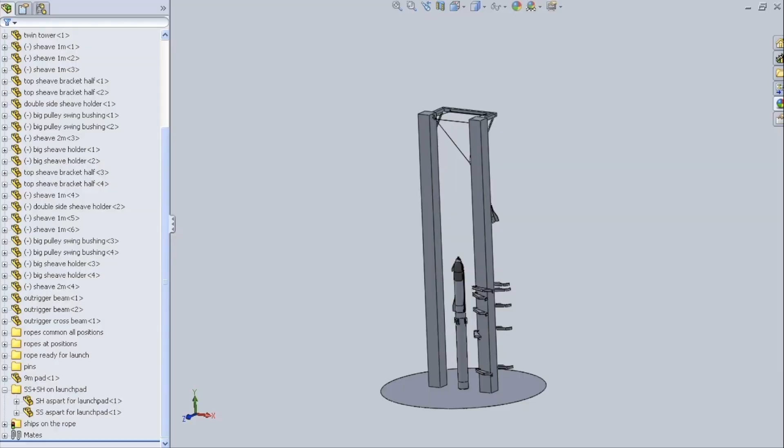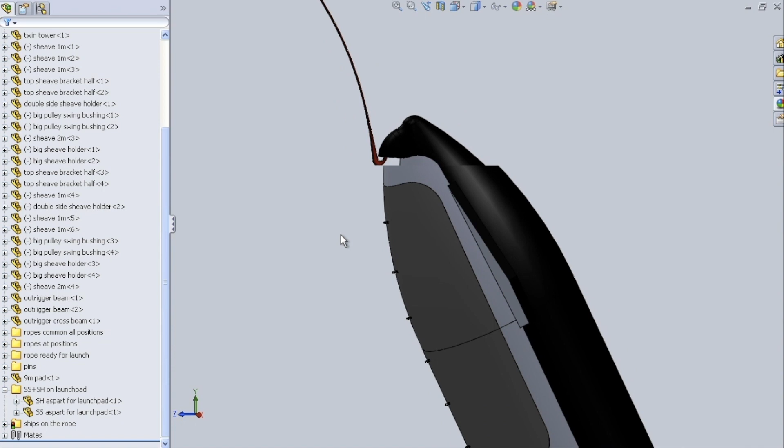You know, for the longest, this was the best idea I had for how to catch Starships and Super Heavies with a wire, like a vertical aircraft carrier. The idea was that Mr. Starship here would have this flip-out long hooky hook thing. I'll show you that. Yeah, let's zoom in on that, Craig.

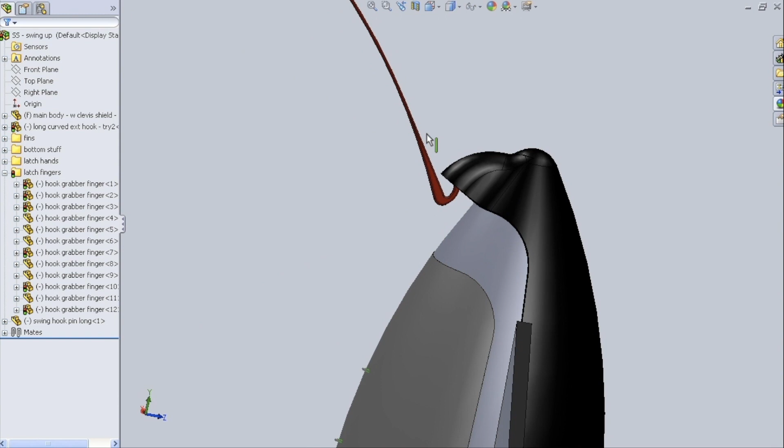Where is that? It's this one here. Yeah, so the idea was that it would have this special heat shield beak, to make room for a pivot point and an actuator and stuff, so that this long thing could swing up like that, and there would be Mr. Hook, and it would never be shaped like that. It would have a much more complex shape.

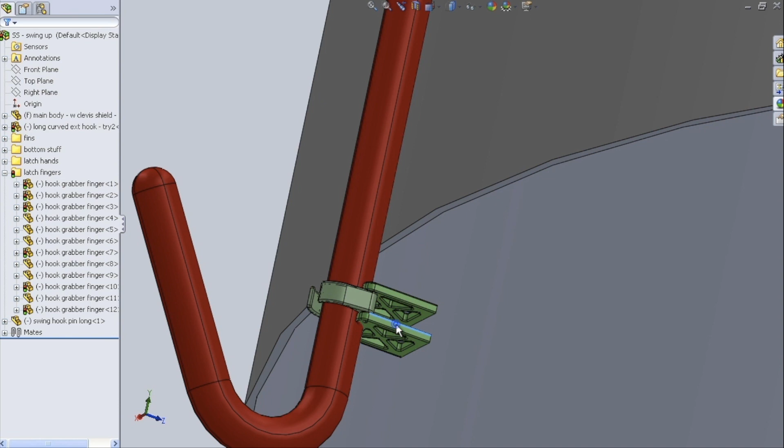But the idea is that this thing would blast up into space, held down not against the cargo door, but against the main body with one of these gripper things. But it would also need a bunch more of these gripper things in order to not shake itself off there and vibrate and all kinds of terrible things on its way into space. So you can already see why I'm having trouble taking it seriously.

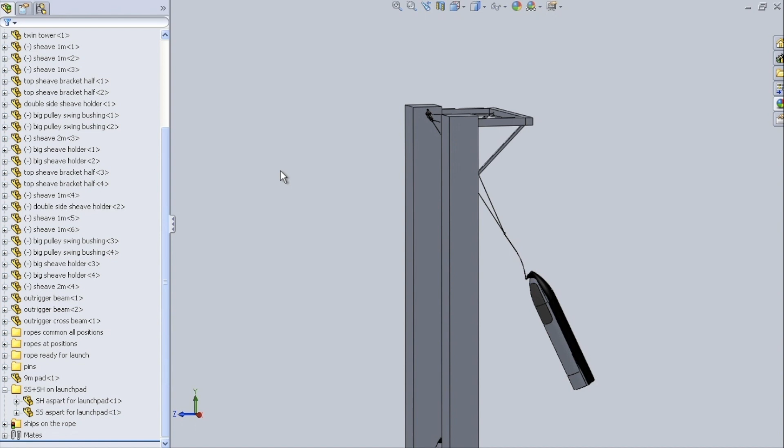Yep, and at the last minute it would swing up like that. And the idea here is that it would be coming in kind of horizontally, snag this wire from this straight-across position. You got these sheaves and pulleys and all this stuff. And it would hook on the wire and it would drop a bit to absorb that energy. And it could swing like a clock like this a few times. And then they could lower it down onto Mr. Super Heavy, which had landed in a similar fashion.

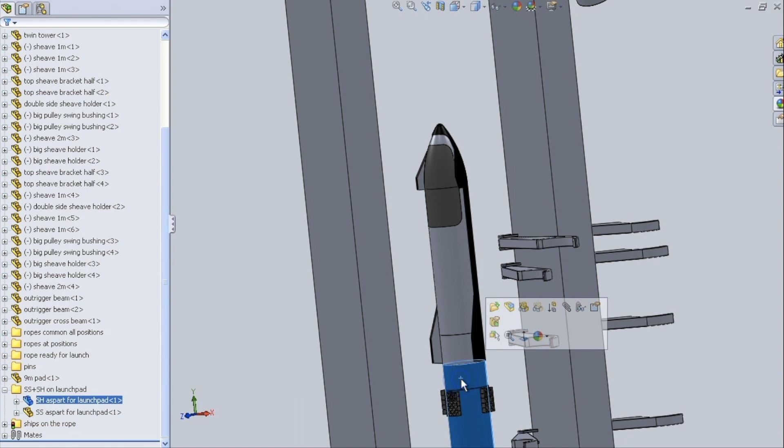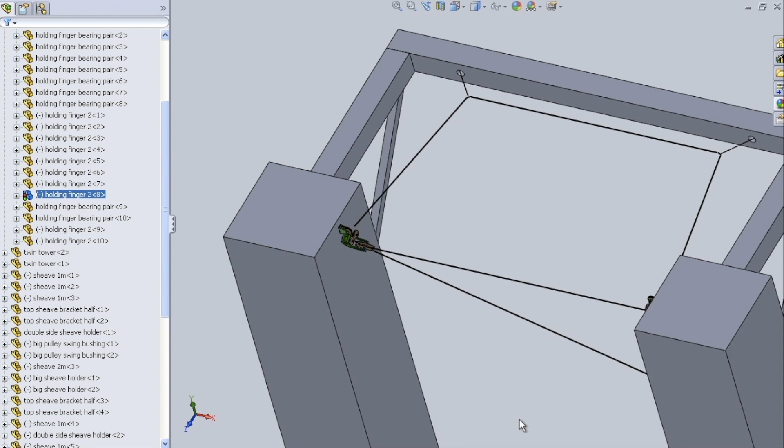I won't bore you with the details. I had a few ideas on how to do it. And then these things would come in and hold on to stuff and then launch again. And then my little innovation here was with just a little bit of trickery, one could actually pull the wire out of the way of the then upward-traveling rocket system.

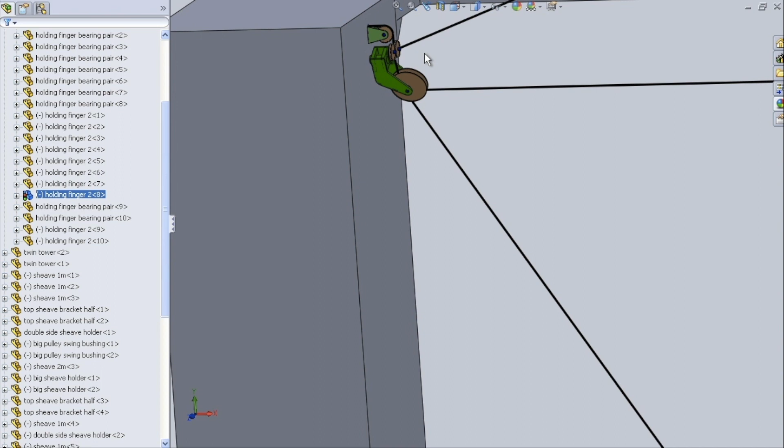But you got these two towers and they're very tall, and the spindly, flippity-floppity nature of this long hook thing, I just couldn't get into it. And then all of these sheaves and pulleys and pivots, this stuff is not easy. It's not. I just couldn't quite take it seriously, honestly.

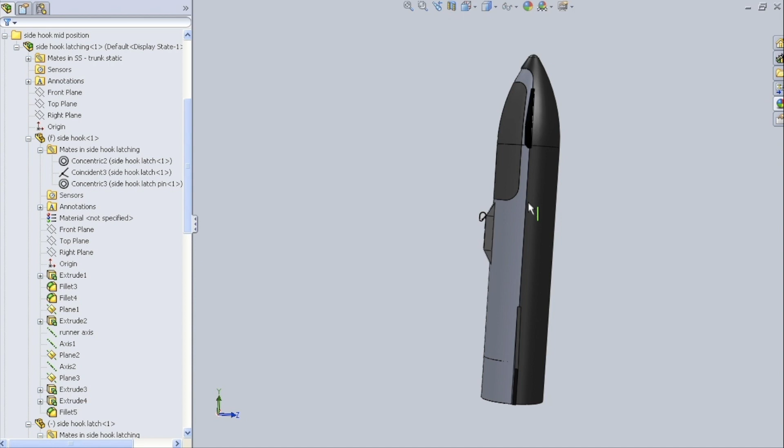I also had this one. The idea was that there'd be a hook just on the side here, static. Here I have it held out and away from that main cylinder. Maybe that's a big deal, I don't know. And that this thing would just back up into that same wire. And maybe it would help if it also had a carabiner-like snap hook on it. Maybe that would be a good thing.

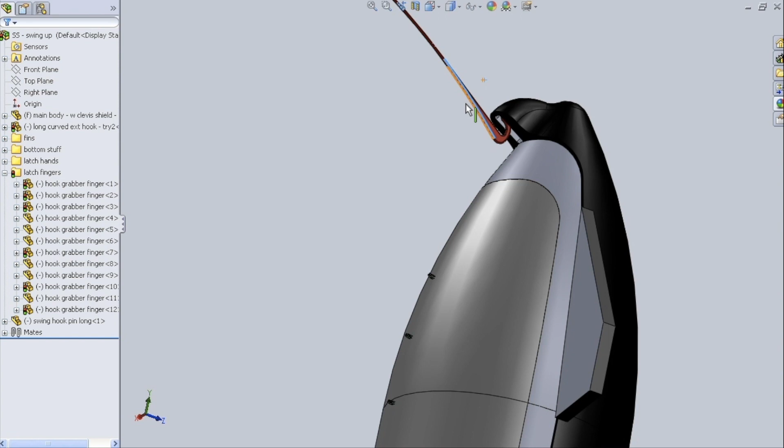But, man, these different things, well, for one thing, the long funny hook thing broke my animation engine on SolidWorks here, and that was a real bummer, so I couldn't even make a video if I wanted to. And also, I just couldn't believe in it. I just didn't buy it, even though it was my own model and I spent weeks on it. I just couldn't get into it.

And there I wallowed in my frustrated woe, a whole month, until Small Stars Mike and the Small Stars Posse, neat bunch of guys, by the way, came out with the guide hooks concept. There you go. Yeah, guide hooks, right. And check this out. So they had this idea, here it comes. Okay, you see them folding out there?

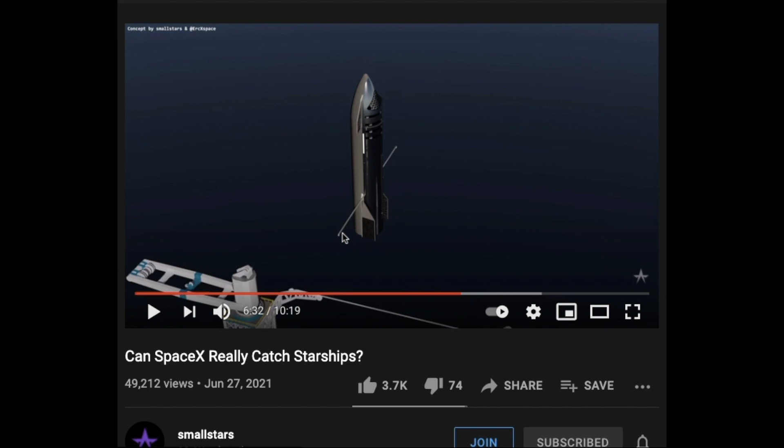There'd be these guide hook things, and their idea is that these things don't actually support the Starship's weight. The whole job of these hook arms is to allow Mr. Starship here to fall somewhere in the rectangle, and these things will be guaranteed to snag on the wires, and then they would have to be actuated, so they would take a little bit of torque, which isn't possible, Mike, if they're so long and skinny.

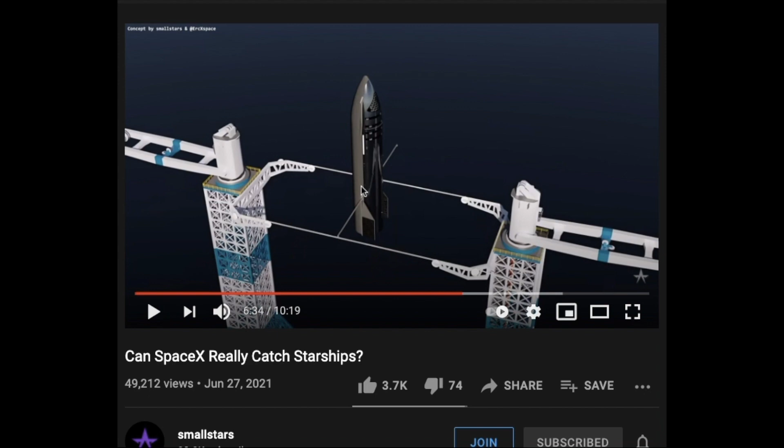But anyway, the idea was that they would fall in there, and then they would have to be actuated to pull them inwards, and then somehow hand off to some much stronger hook mechanism things that were welded directly onto the Starship's body.

Yeah, so a handoff kind of thing. And I got problems with it. It's not a perfect idea. And so what? No one cares. I was still impressed, and it was better than I had figured out for a while myself.

At least that's how it felt after I had been wandering in circles for a month with the stuff I just showed you. And it got me off my butt to think, okay, Craig, finally, here's something that you can try to derive from. I'm not the greatest inventor. I'm a deriver. I'm an improver. I'm a nerdy perfecter. And so this is exactly what I needed to get a move on to somewhere else. And that's what I'm presenting with you here today.

Let me show you. And I call it the Dorsal Hook scheme. The Dorsal Hook wire catch landing scheme for the Starship and Super Heavy. Is it a perfect idea? I don't know. I'm not smart enough to tell. But it's the best I can do so far, and I wanted to present it now, get it off my chest, and see what happens.

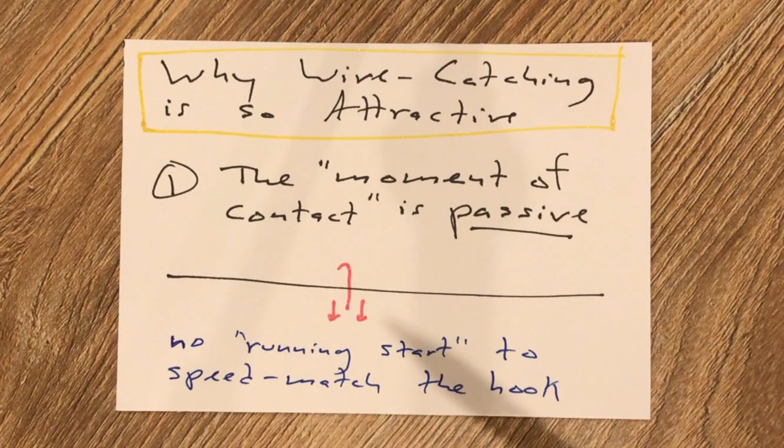Also, that initial impact between the wire that's moving at speed 0 and the hook that is traveling at speed something, the initial impact is actually rather gentle. Because, you see, this wire is not a solid mass. It's flexible, right? So in the initial strike, there's actually only a little bit of wire length, wire mass that is being instantaneously changed from speed 0 to speed spacecraft. It's one of the amazing things about this flexible wire stuff. And so the initial impact is actually quite gentle. There's not that much violence being done to the spacecraft in that impact, which also helps explain why the tail hooks on the fighter jets don't get ripped off every time. Same thing.

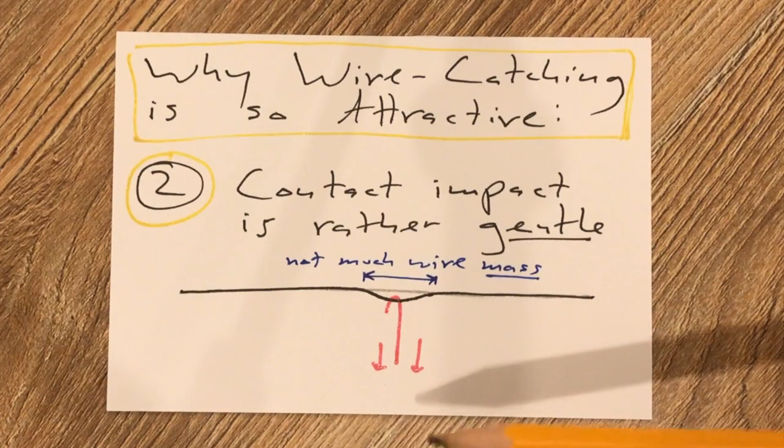Okay, also, initially the braking force is very low. So after that very light initial impact, the braking hasn't even started, even after that first hook has been made. It's because sine 0 is 0. Sine of almost 0 degrees is basically 0. So even in the first little bit of travel there, as the hook is traveling downwards, there's actually very little braking force going on. The braking force builds as the hook moves further, as the wire is pulled away from horizontal.

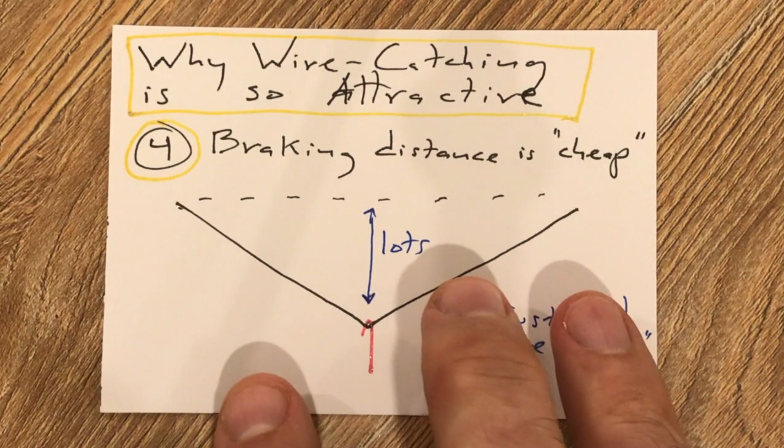You see this in the movies on the aircraft carriers, by the way. You can tell that the wire isn't really pulling back on the fighter jets until it's traveled a good plane length or two down the deck. That's a good thing. We're all about trying to minimize violence to the spacecraft, which means we're minimizing the weight of the extra elements that have to take that violence.

Braking distance is cheap. You can get a lot of vertical travel here, not by needing some very large vertically moving actuators. Oh, no. You get lots of vertical traveling room and therefore less braking force necessary to stop it, just by allowing more wire to pay out of whatever the wire's paying out of. That's cool. So you don't need large actuators to allow for a lot of vertical movement. You just need to allow enough wire to come out of whatever the wire's coming out of. That's a big deal too.

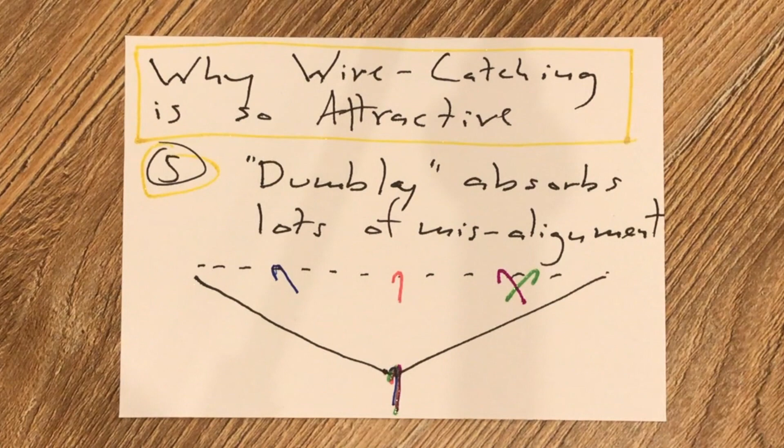Also, it dumbly, if you will, absorbs a lot of misalignment. So whether you hit the wire exactly where you want to, or if you're at a funny angle to the left or to the right, it all ends up in the same place. Has to do with angles and this and that, and that's a good thing too. So you're absorbing a lot of misalignment in the landing flight path without a whole bunch of fancy precise actuators to allow that to work out without breaking something.

Why is wire catching not attractive?

Well, we're getting into Dunning-Kruger territory for me, because SpaceX has not been singing the wire catching song, have they? But to me it's so obvious. That means I'm missing stuff, because I'm not smarter than SpaceX. I've got two guesses as to what probably makes wire catching unattractive, and please chime in with your own.

One thing, that catch wire is not easy to model. It's not a solid mass. It's flexible. It can bounce off of stuff. It does all kinds of bending and flexing. So it's really a bunch of elements, an infinite number of elements with a certain bending and stiffness relationship with each other.

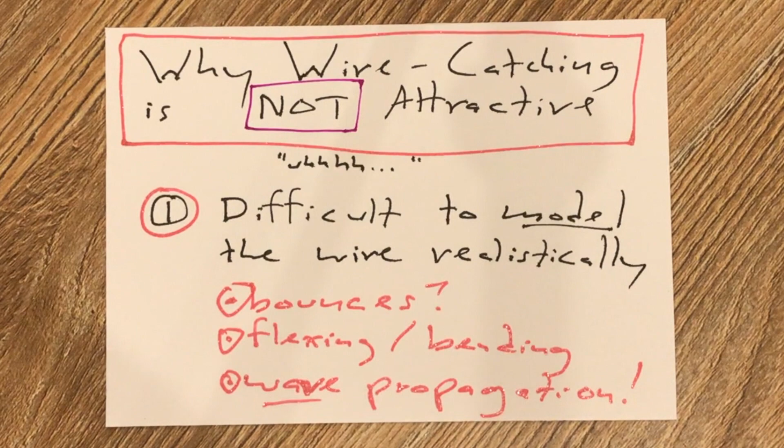And then there's wave propagation that can go on in that wire, and who knows what kind of problems that can make. I have no idea, but I know it's complicated. It has to be complicated. It took the Navy quite a while to get these things to work right, and they're not stupid either. Now the other element that makes wire catching not so good is that this is a high maintenance machine.

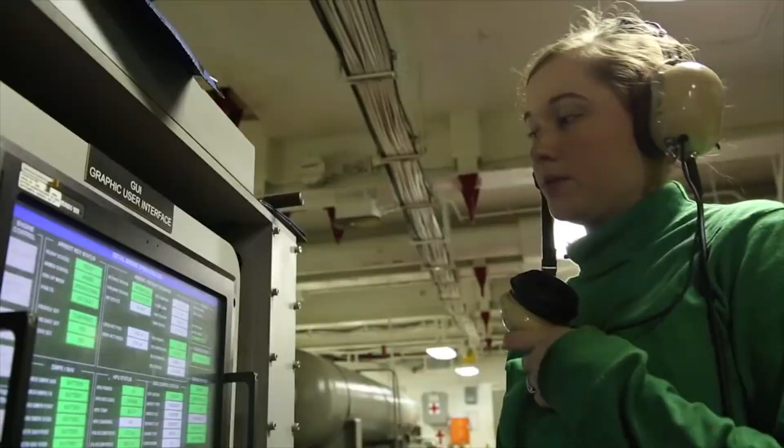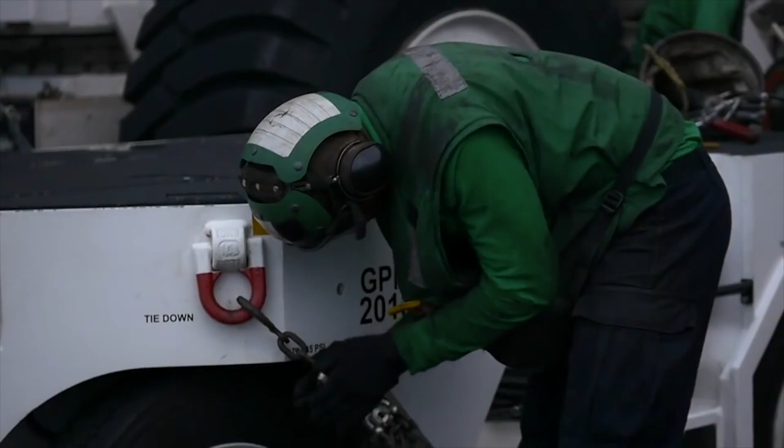On the aircraft carriers, you will see there are dozens of sheaves and pulleys, and this wire is going here, and going there, and going around blocks and tackles, and there's hydraulic stuff and pneumatic stuff. It is a complex machine, which means all kinds of places to break, and also all kinds of opportunities for the real world machine to not behave the way you thought it would. Right.

So to that end, trying to preempt some of that complexity, and the doubt that one would naturally have in the fidelity of his computer model of that complexity, I want to suggest the pulley-less wire machine. What do you mean, Craig? I wanted to come up with some scheme for wire catching and braking that doesn't involve a bunch of sheaves and pulleys.

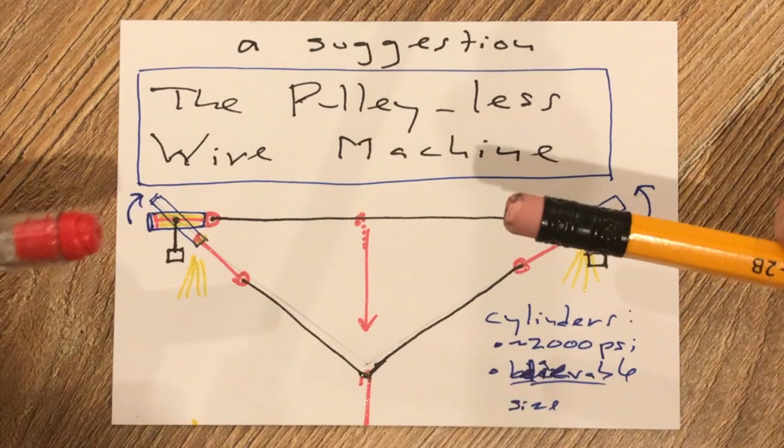My idea is that there would be two hydraulic cylinders on pivots, but also some turntable elements, so that you can have motion that's not perfectly in the vertical plane, and it won't be. As you pull down on the wire, the piston gets pulled out of the cylinder, forcing the hydraulic oil inside out, probably through a check valve.

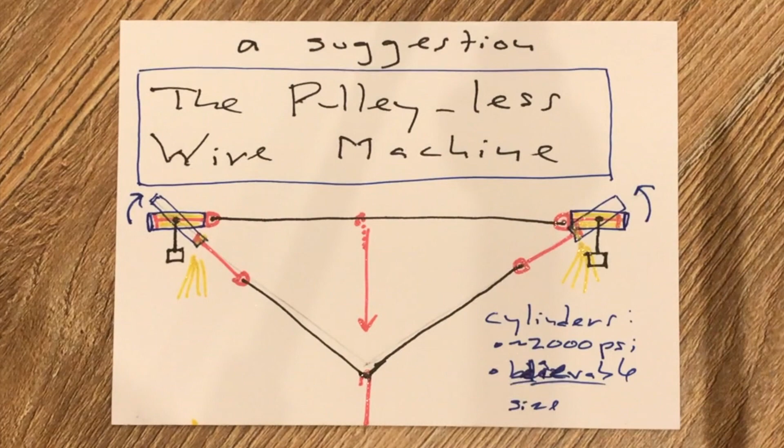And every cc of that pumped through a certain pressure differential and squirted out into the world, if you really want to be sloppy about it, that's so much energy. How much energy? How big are these cylinders, Craig? Well, I'm not sure, but let's reach. Imagine a 300-ton Super Heavy striking that wire at 20 meters per second. That's fast. That's like dangerous fast.

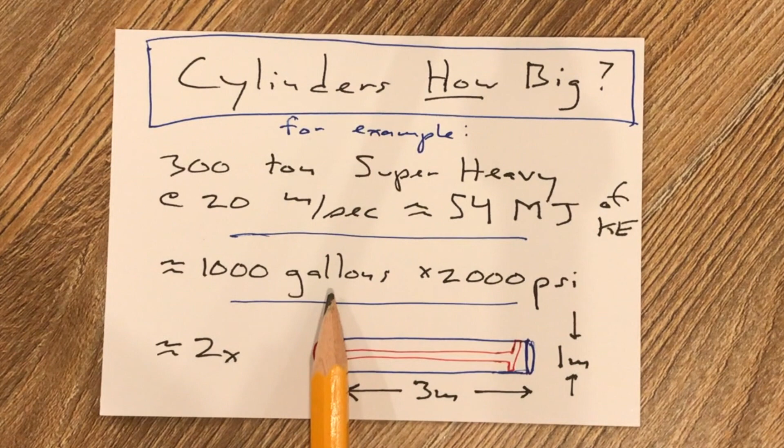How much kinetic energy is that? 54 megajoules. Is that a lot? Well, I'm not going out with my baseball mitt. But 54 megajoules, that's 1,000 gallons of hydraulic oil or mineral oil or maybe even water, there's such a thing as water hydraulics, pumped through 2,000 psi of pressure differential.

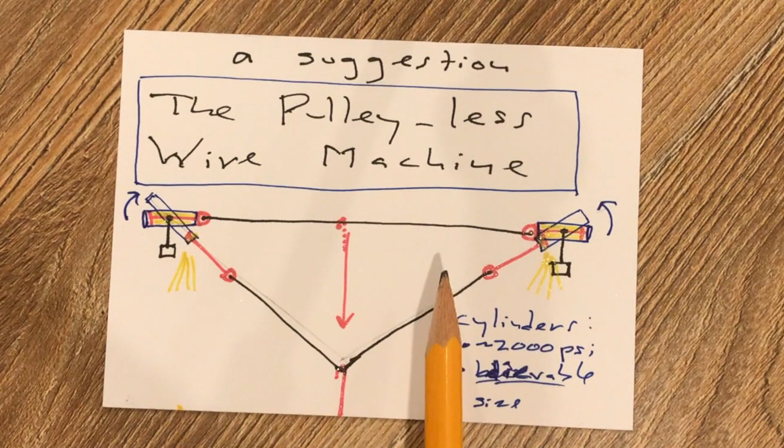So those could be 2,000 psi check valves just squirting out into the world if you wanted to be sloppy. Is 1,000 gallons a lot? Well, that's 2 times 500 gallons. Yes, Greg, you're such a genius. But 500 gallons is one cylinder about 1 meter in diameter and about 3 meters long.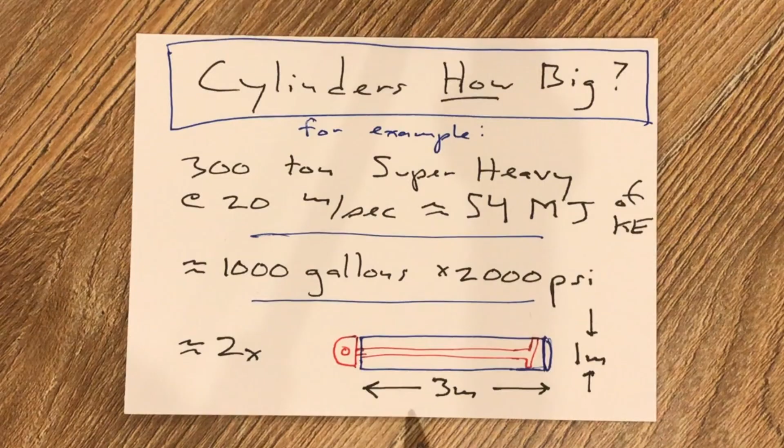And this is something you can get. Hydraulic cylinders 1 meter diameter and 3 meters long. Not out of the catalog, not with next day shipping, but the guys at Bosch Rexroth in the Netherlands can make that for you. Not in a weekend, but they can do it. This is not wildly huge.

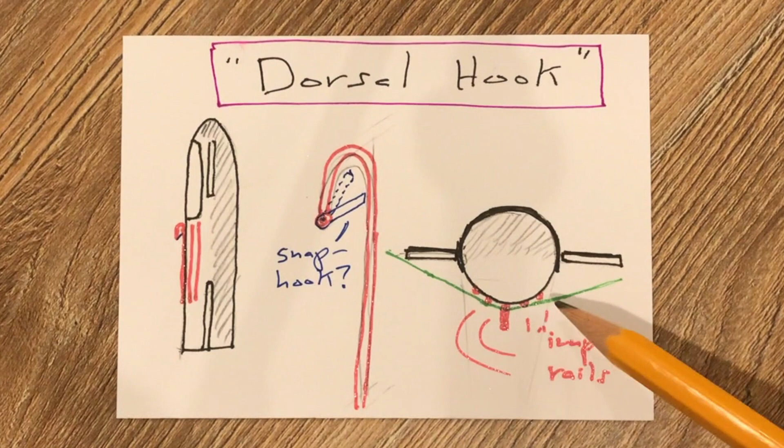As far as the flight hardware on the Starship, I'm imagining dorsal hook here on the side, and then vertical impact rails. They work like a luggage rack. The idea is to keep the catch wire from whacking against or scraping along the 3 millimeter thick body of the Starship. What are these rails made out of? I'm not sure. How long do they last? I don't know. They're surely a semi-wear element. They can't last forever.

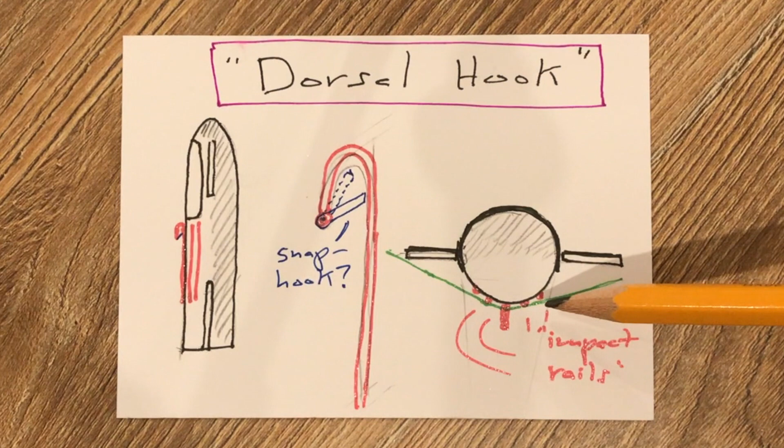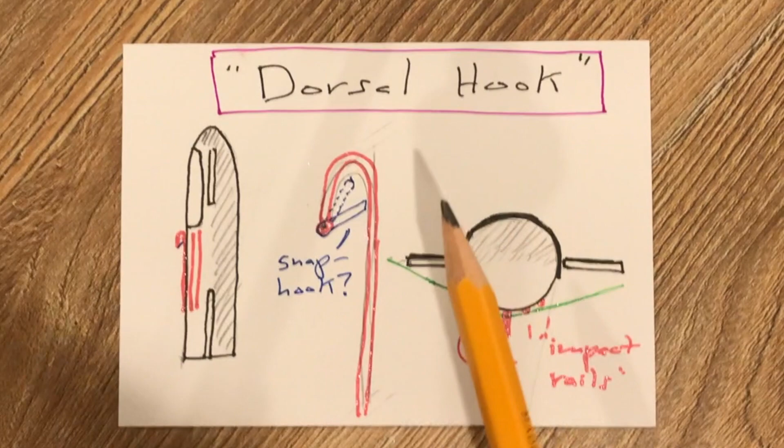And there's that snap hook also, the carabiner snap hook that I think might be handy. Yeah. And maybe it's on the Super Heavy too. Why not? Anything light enough for the Starship is also light enough for the Super Heavy, just by the way these math things work out. You can be more gratuitous in the weight you add to the booster than you can in weight you add to the Starship, to the orbiter, the top stage, you know?

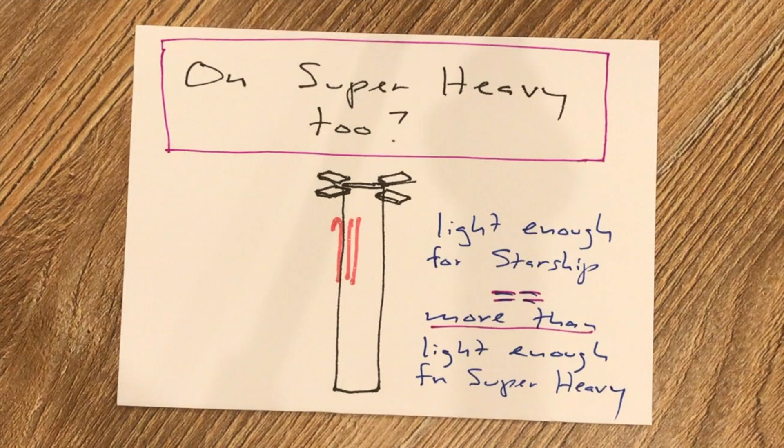Yeah. So it would look something like this, I guess. Now, you guys aren't dumb. Of course you're not. You figured it out, didn't you? That's right. You know, if the hook is out here on the side, on that back side of the spacecraft, and the center of gravity is, of course, somewhere down in the middle, that means you're going to end up hanging at a funny angle. Yep, you're going to end up at an angle. There are definitely going to be structural consequences to this.

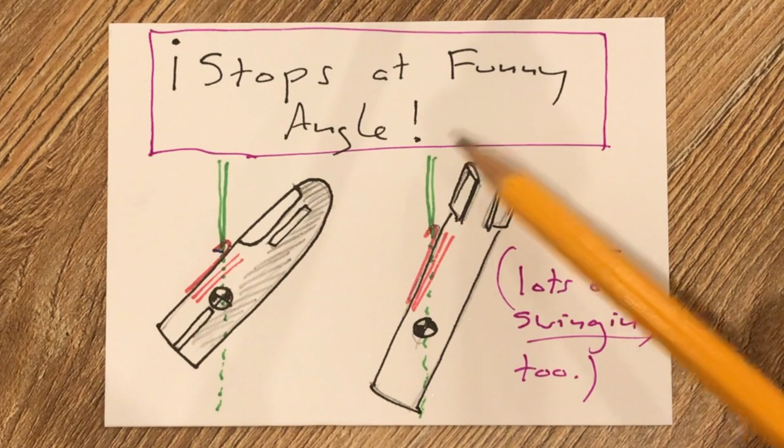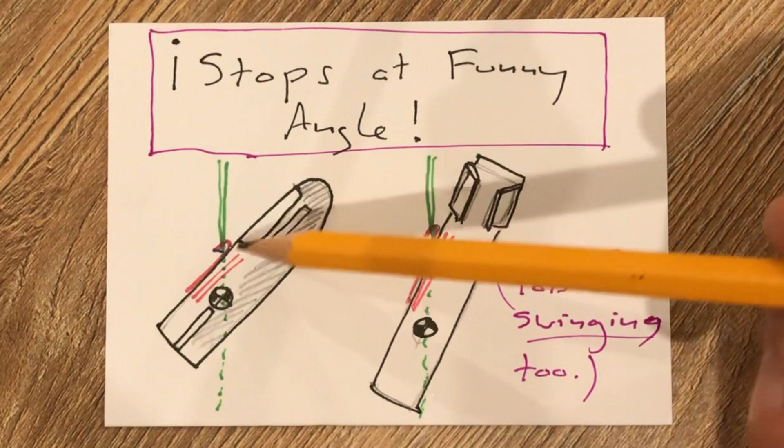Yep. Also, it means that to get these things upright again, we're placing demands on whatever kind of crane picks things up again. You're going to have other contact points, and you push on this, you pull on this, you attach this subframe to this, then you blah, blah, blah. It's going to be a bit of work to get these things pointed straight up and down again. Yep. And I'm hand waving that right now.

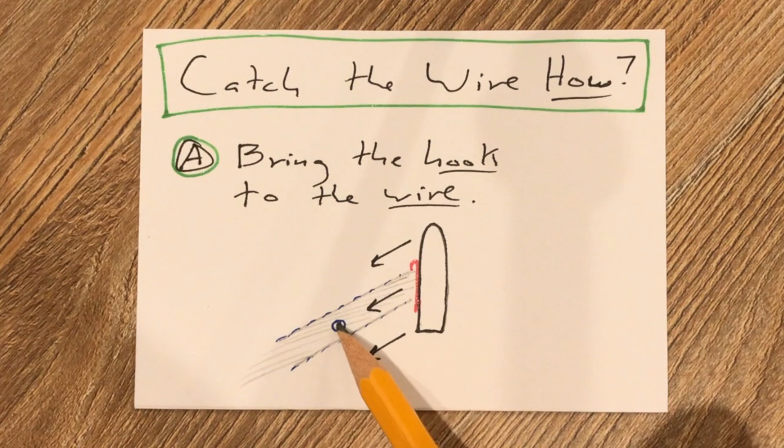And so how is the wire placed into the hook? Well, that's a good question. One way to do it is to bring the hook to the wire. So here the wire is sitting still on some sort of arms that are reaching out stationary-wise from the top of a tower. And the spacecraft itself is backing up and downwards in a super controlled way, such that it will impact the wire somewhere along the length of the rail.

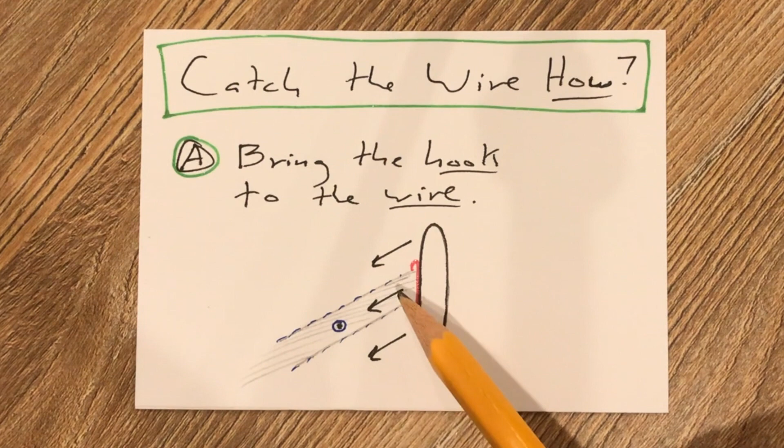That's the idea. How precise is this? Is this hard or easy? I'm not qualified to say. Maybe this is no big deal. Maybe when SpaceX guys see this, they say, yeah, no problem, we can do that. If that's hard in real life, then maybe we can add some complexity and have it work out anyway. That is to say, bring the wire to the hook.

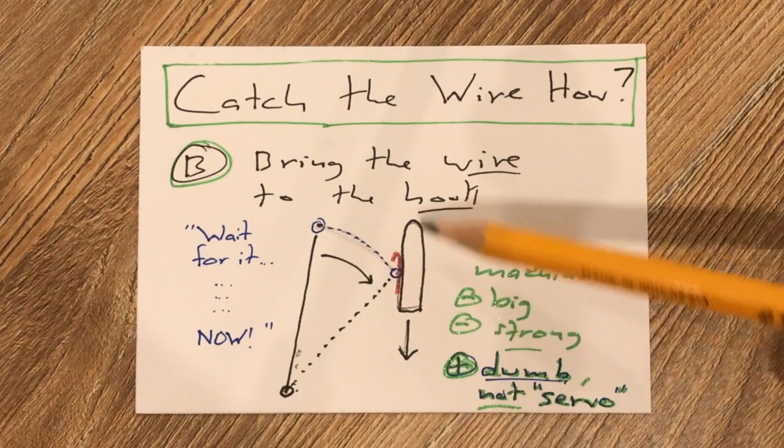So here the spacecraft is moving, in some window of target here, and it's moving basically just vertically downward, just descending. And then the catch mechanism is on some kind of arm. It's a big, heavy thing. Yep, it is. But the point I want to make is that this mechanism of swinging down, this is not a servo mechanism. This is not receiving a 12-bit number every 1,000th of a second. Rather, it does just one thing.

Does it fall by gravity? Is it pushed out by some sort of a cylinder, or a hydraulic, or a pneumatic thing? I don't know. But whatever it is, it's a one-trick pony. It does one thing. It goes from A to B.

And the idea is that the spacecraft is carefully instrumented, and there's all sorts of sensors and radars and whatever all over this thing, such that the tower knows exactly where the spacecraft is, and it's watching it and knows exactly how it is moving through space. And the tower also knows exactly what that lunge motion is, such that it knows when to pull the trigger, such that it will, bam, make contact in just the right place. And given all the crazy things SpaceX has done, that doesn't sound too hard, does it?

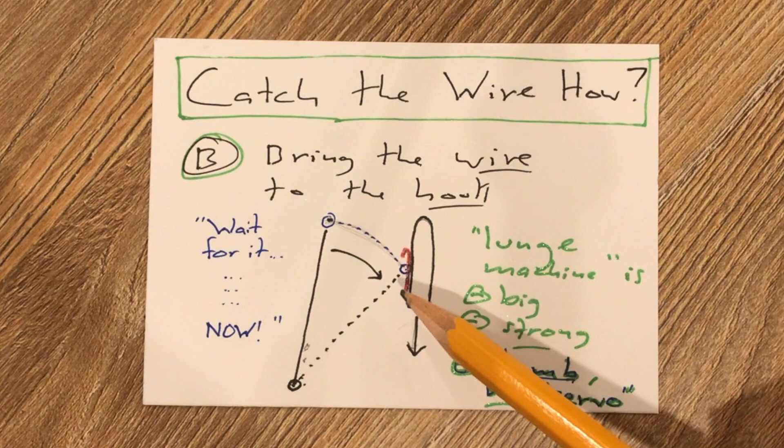Now, this actuator, this movement, this lunge machine, if you will, that ends up pushing the catch wire towards the spacecraft, it's big and it's strong. It's big and heavy and strong, but at least it's dumb. At least this is a dumb motion. It goes from A to B and that's it. So we have a chance of this being actually possible to do.

That's what I got, folks. Take these elements, use it however you want to use it, include these things in your work, and let's see what you can derive from this. Hopefully something.